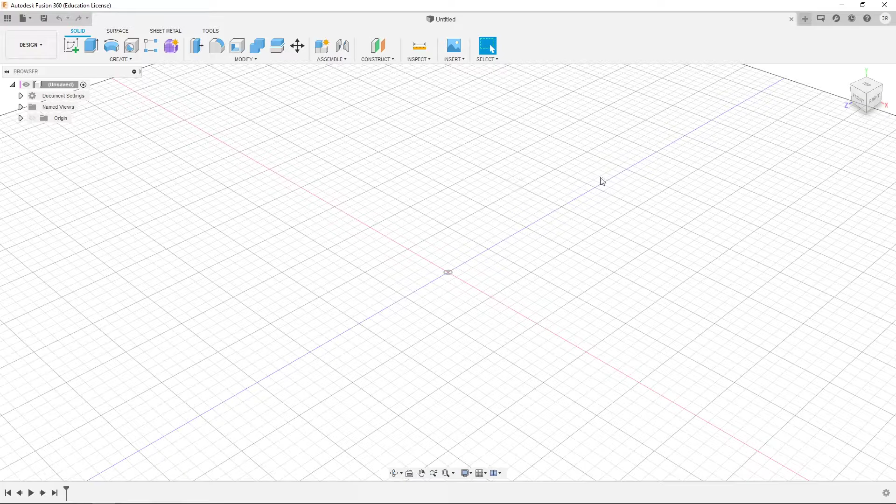I'm going to create a very simple sketch. I'm going to make a new sketch, pick the XZ plane just so it's top down. I'm just going to make a rectangle that's centered on the origin. And to save myself some work, instead of doing a 2-point rectangle, I'm going to choose a center point rectangle, so that way I can coincident with the origin. So I have my center point rectangle. I'm going to click the origin.

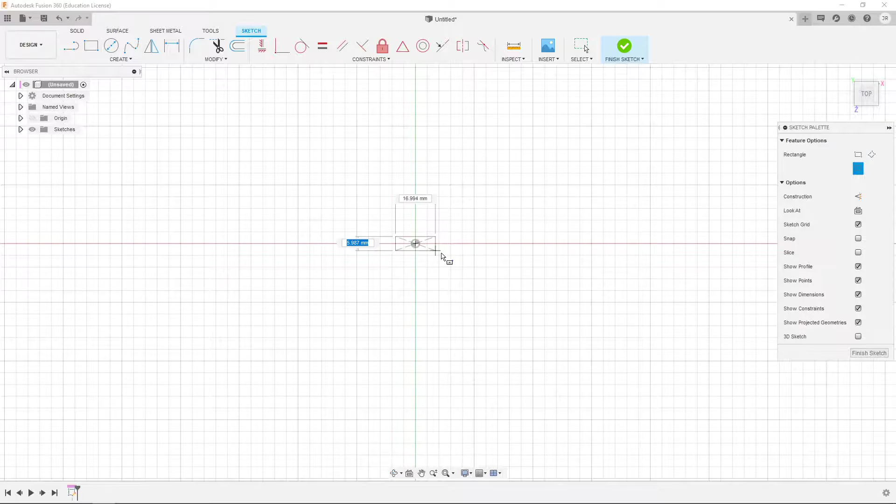And notice how it kind of makes this by default, and I'm going to choose 60 by 60, so it's a square. And there it is. And notice that it automatically made some construction lines for us, which is very convenient. I'm going to go ahead and finish the sketch. I'm going to extrude this out upward to 60 millimeters. So it's a perfect cube that is 60 by 60 by 60.

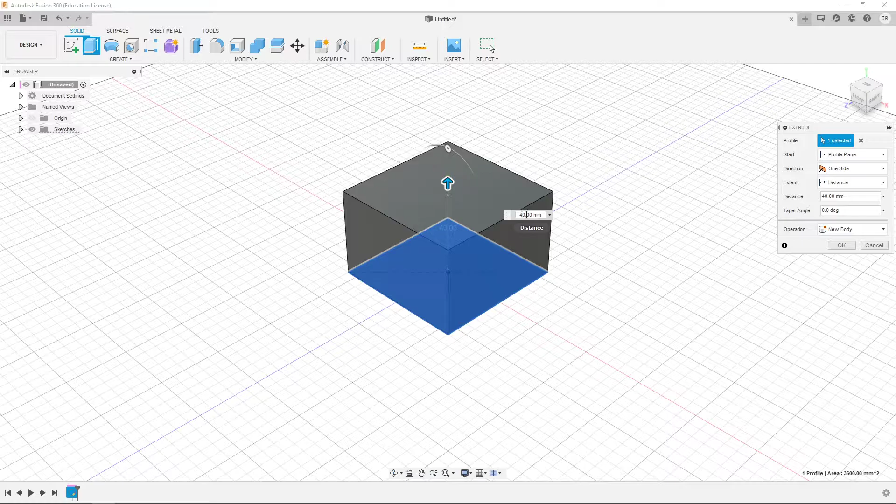And now I want to fillet the edges. So I'm going to pick one edge so we can see what a fillet is. A fillet is a manipulation of the 3D object, an edge, which is a line that connects or is one part of a face. In the Modify menu near the top here, we have the list of many different things that we can do on 3D objects. The first one, which has its own shortcut, F, is the fillet tool. And the description says it adds fillets or rounds one or more edges.

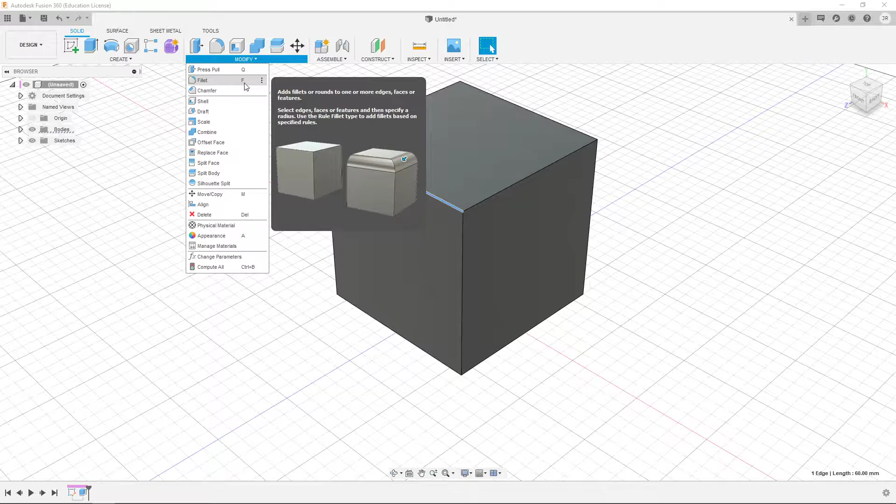So we can actually select multiple edges. I'm going to choose one first and try it, see what it looks like, and then we can maybe add more. So I'm going to click it. I had the edge already selected, so it's already there, but I can always click another one and I can unclick them as I see fit. And as I click edges, notice they show up on the right side, and then it asks how much do you want to fillet this edge?

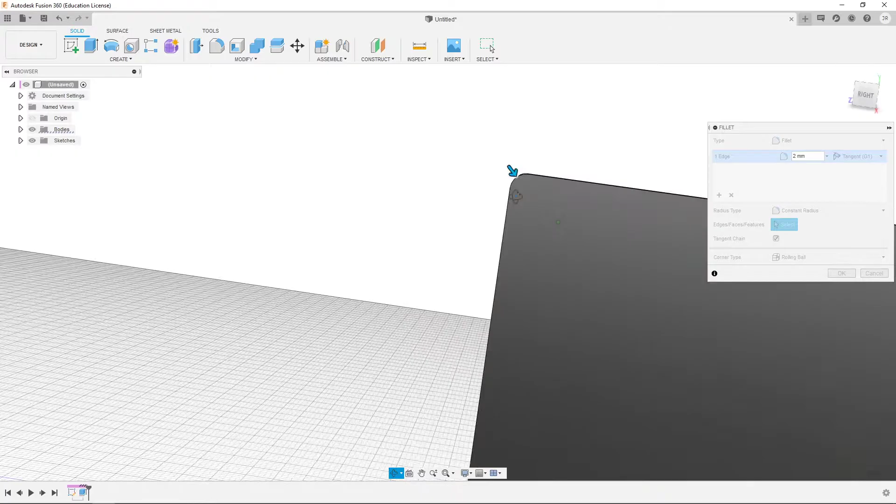So let's go ahead and type in a number. Let's put 2 millimeters. And you can see immediately it gives us visual feedback that it is rounded. It took a sharp edge and made it round. Now notice the other edges are flat, and so we have to ask ourselves, what's going to happen if we fillet two edges? How do they connect with each other, and what happens to that corner? So let's go ahead and cancel and try it one more time.

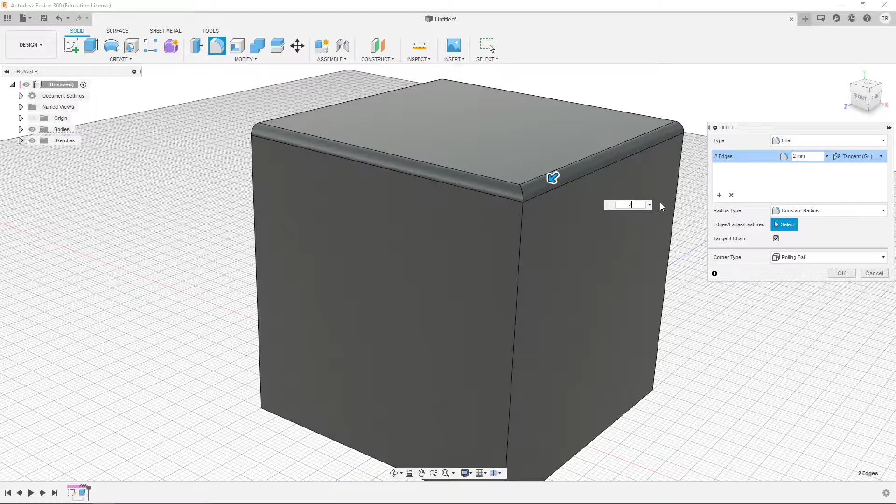I'm going to do Modify, Fillet, but this time I'm going to select two edges at the same time, and put it at 2 millimeters. Now you can see that it rounded both sides, but down the middle, it's a sharp edge, but it is a rounded sharp edge. You can see that kind of hook there as we look at it. So that's what it looks like when only two edges are selected.

And we can play with this as much as we want. We can always add fillets to more. Right now, this is a 2 millimeter fillet. The corner type is what changes, so rolling ball applies when all three edges that point to a corner are selected. Right now, there's only two. So let's try doing this and see what it looks like.

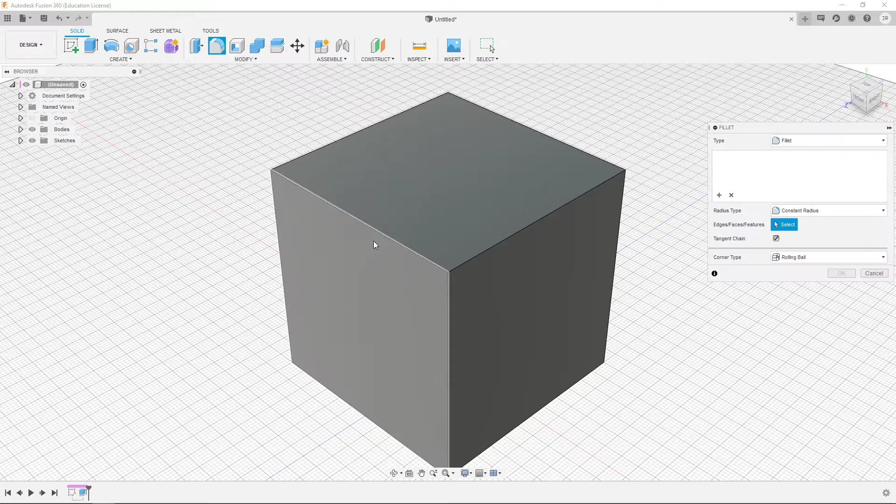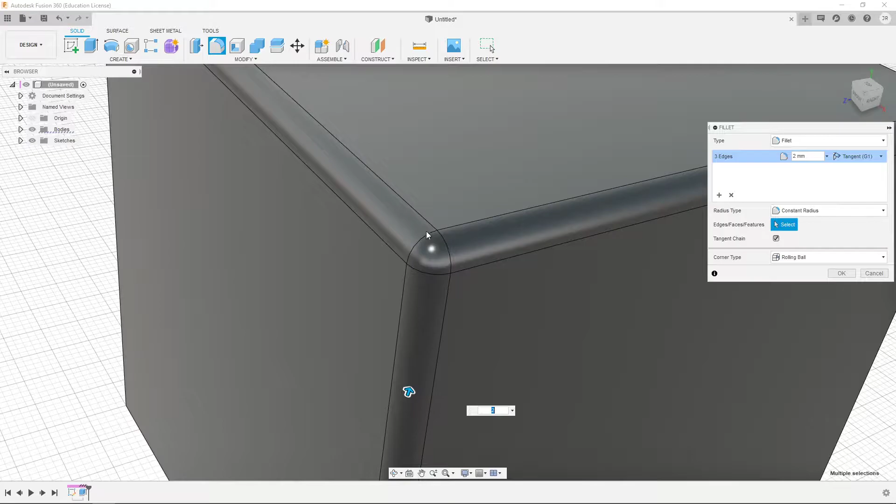So Modify, Fillet, and I'll just pick 1, 2, 3. Because all three of these lines are connected, this corner is going to have a particular behavior. Right now, the default is rolling ball. I'm going to put 2 millimeters, and you can see that that corner is a nice round corner. The result is kind of like a curved triangle, and that's our corner.

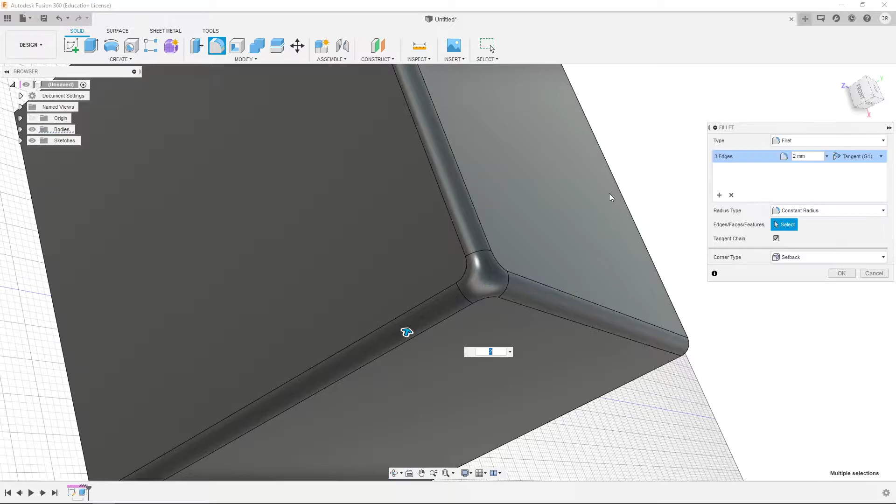Now, if we switch it to a setback corner type, it's similar, still round. In fact, it looks a little bit more rounded, but the edges have a flat cutoff point, and then the corner is its own feature with kind of a Y shape to it. So if that's what we want, we can have that, but we have to recognize there's different styles, and it's really a matter of what you prefer. There's no right way. It's whatever you think looks best.

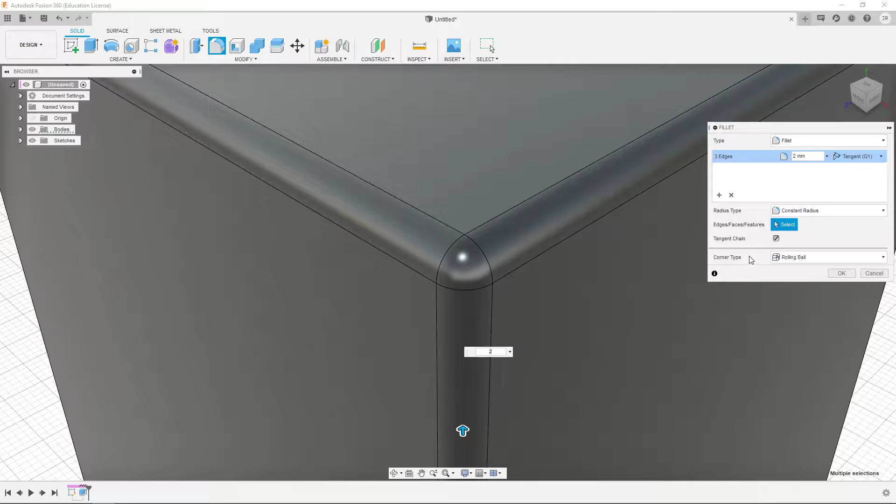So rolling ball is the typical one. You have more of the original edge available, so the feature in the middle is a much smaller and simpler feature. That's the only real difference that we want to play with. So I'm going to cancel.

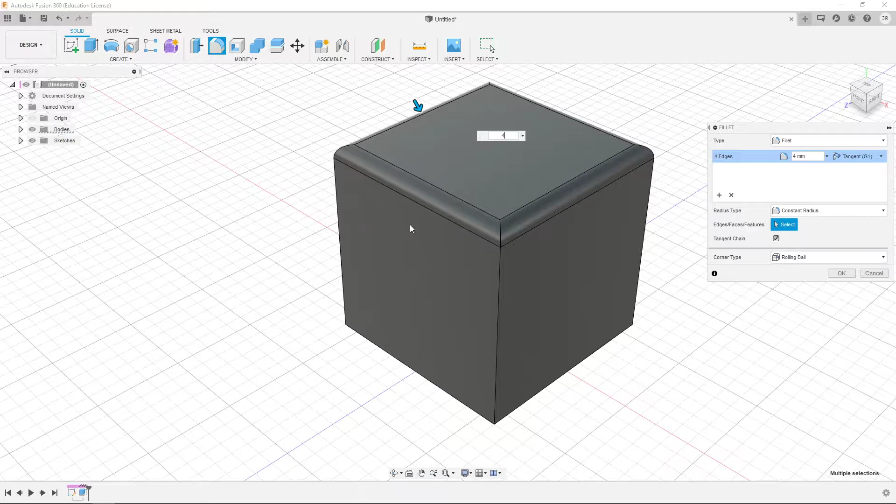I'm going to do one last thing and fillet just the top 4 lines. So Modify, Fillet, 1, 2, 3, 4. So 4 edges selected, and let's put them at 4 millimeters apiece. So they're pretty round. And again, since these side edges were not filleted, they all have a sharp round edge, and I'm okay with that, so I'm going to click OK. And so that's a fillet. A fillet is very simple. It's just a nice, easy way to do this.

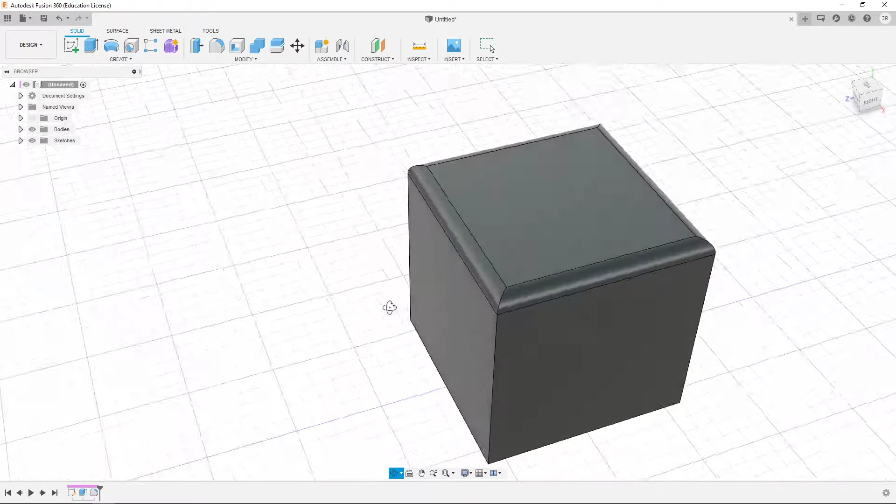Because these are outward-facing edges, the curve goes around it. If we had a divot, we could also make it look inward. It's the same idea—we can play with this in a lot of ways and make things look nice.

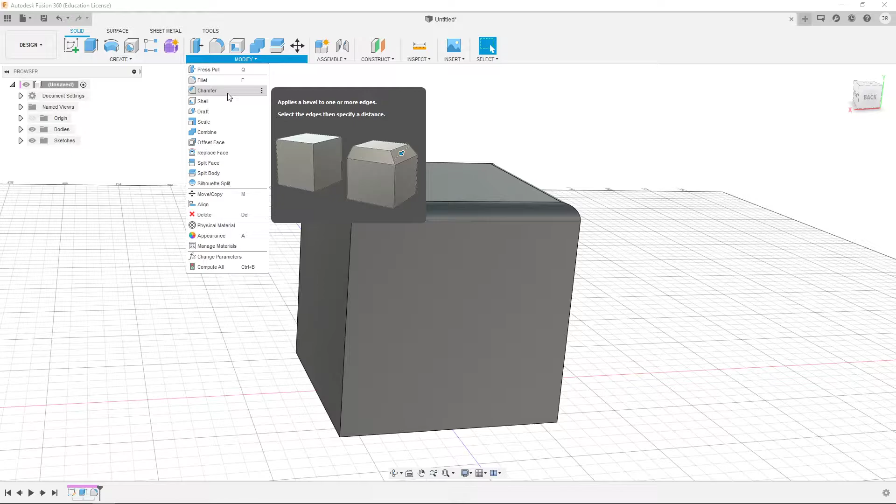So on the bottom of our cube, let's do a chamfer and see what the difference is visually. Chamfer is just like fillet, but it doesn't have its own keyboard shortcut. Basically, it bevels an edge, making it flat—so a sharp edge becomes another surface. The angle is based on how many millimeters we choose for our chamfer.

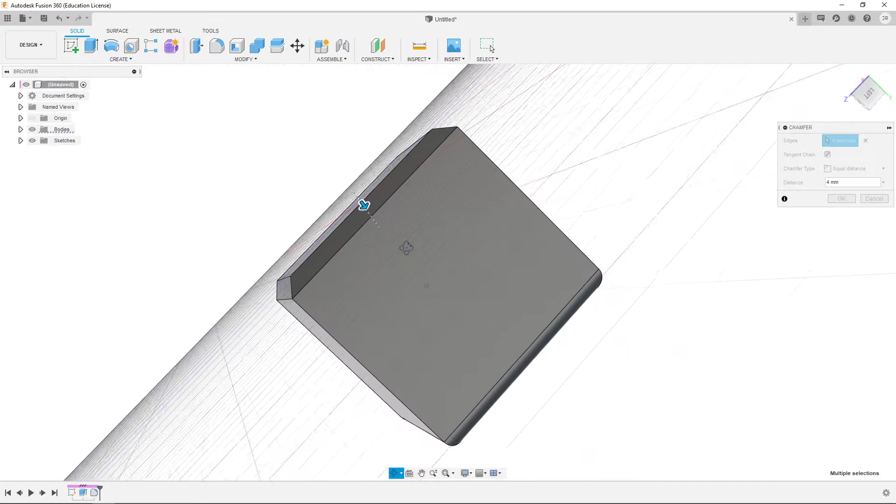I'm going to select chamfer, and choose the bottom 4 edges—1, 2, 3, 4. Now those bottom 4 are selected, and let's put 4 millimeters. You can see, there it is. The only difference is if you look at the actual edge, it's a straight line as opposed to an arc—that's the primary difference. This gives us a nice sharp beveled edge, so if you want that, it's a good choice. Chamfers are also really useful for things like that. So we'll click OK, and there it is.

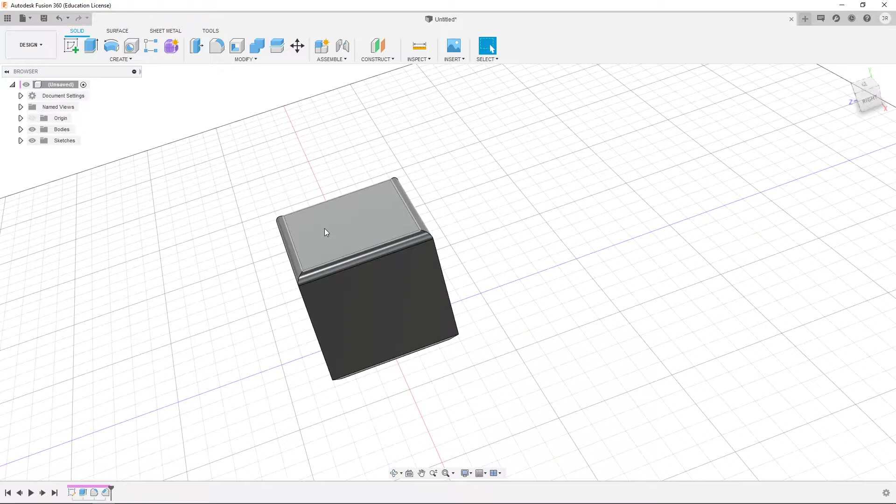Now I want to cut a hole in the middle of this cube so we can see what the fillet and chamfer look like on a circular opening. Right now these are straight edges, but how about on circular edges like a hole?

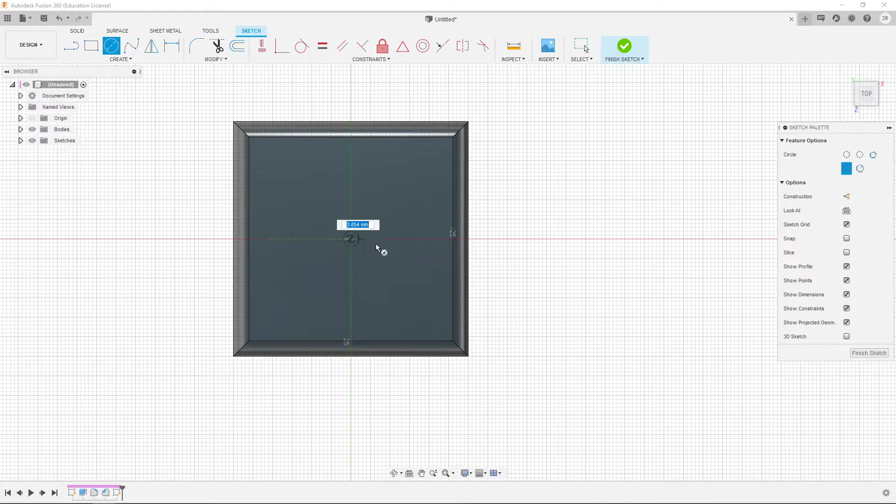Let's put myself in the home view and make a new sketch on this top face. I'll select it, it turns blue, and create a new sketch. I'll use the circle tool and put it right in the center, then set it at 20 millimeters—so I'll dimension it as a 20 millimeter diameter. There it is, fully constrained. I'll click Finish Sketch.

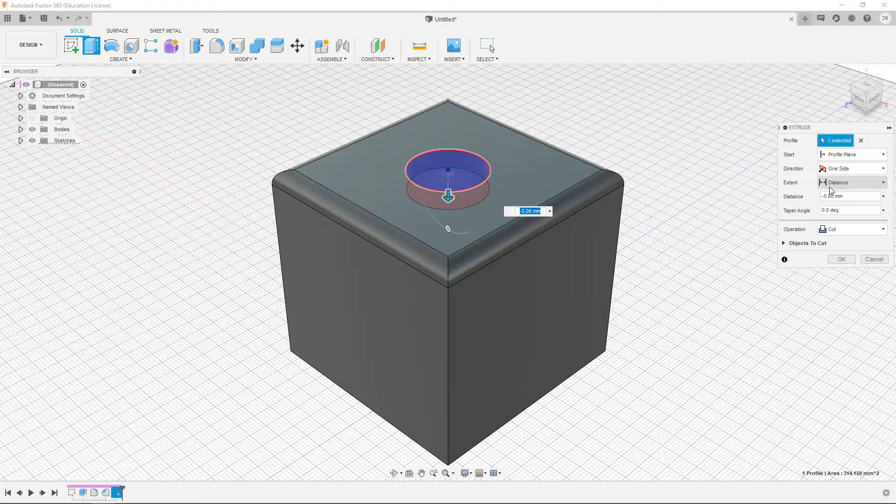Now I'm going to extrude and cut this hole out. I'll click this feature, bring it down just a little, then change extent from distance to all, and it'll cut all the way down through. Now we can see this hole goes all the way through.

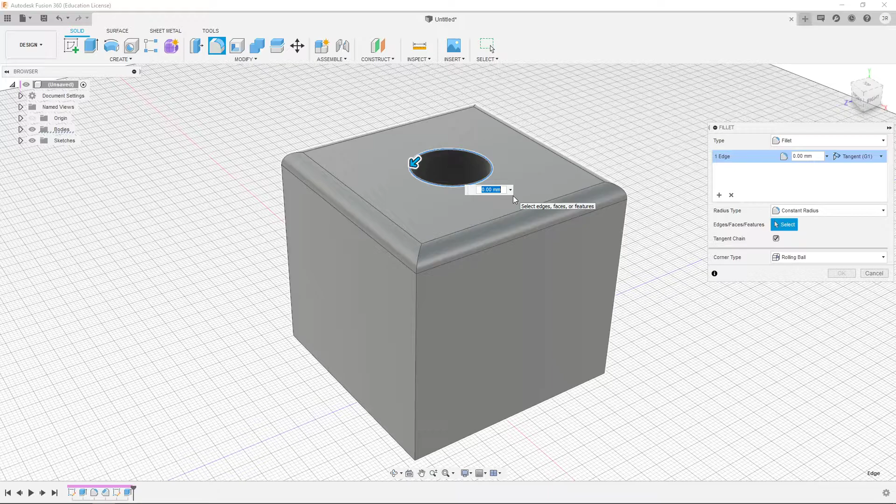Let's choose this top edge, so I have that top ring selected. Let's choose fillet—fillet also has a button at the top, and chamfer also has a button at the top. We can click any of those or hit F on the keyboard. Let's put it at 3 millimeters and click OK. Notice we have a nice round internal edge—the opening is smooth.

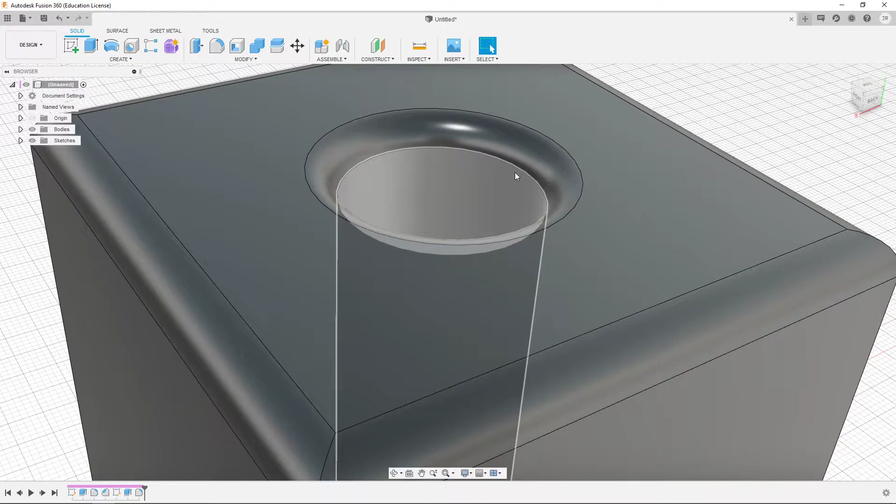This is very useful if you think about how things are inserted—for example, a rod might have to slide into this hole to connect two items. If there were flat, sharp edges, and you didn't have it perfectly aligned, it might be too snug. With this round edge, it allows for human error—you can push it against the rounded part and slide it in more easily. Fillets and chamfers are helpful for that friendly use by a person, since we can't always align things perfectly. If sharp edges got caught on each other, it might be hard to insert something—so a fillet makes that easy.

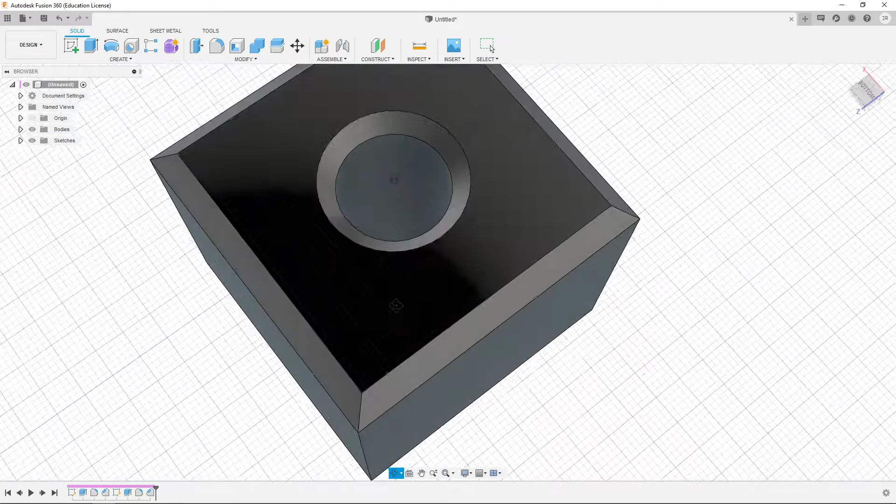Let's look at the bottom side and do the same thing. I'll choose this bottom edge, but instead of a fillet, I'll use a chamfer—modify, chamfer, 3 millimeters. It's the same idea, but this one is a sharp divot, like a nice opening—it's steeper, but it makes it easier to insert and grab something into the hole. The result is the top has nice rounded edges, the bottom has nice sharp chamfer edges, and whatever we prefer, we can use this on any edge.

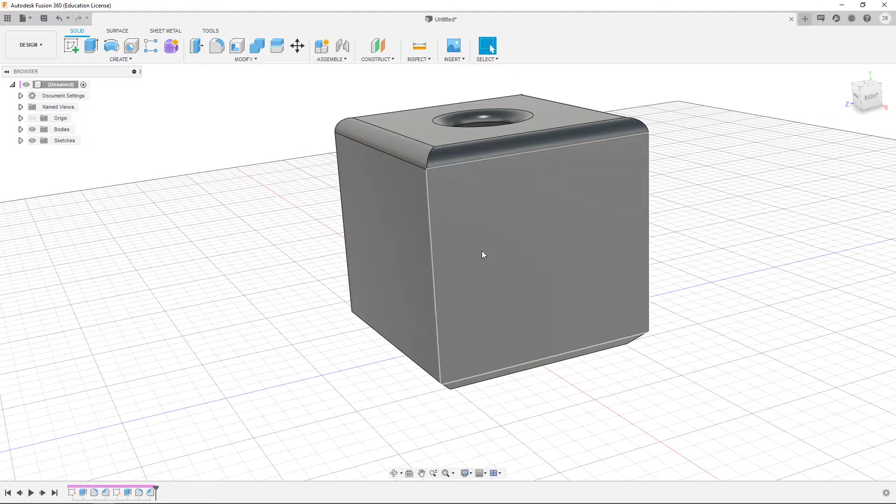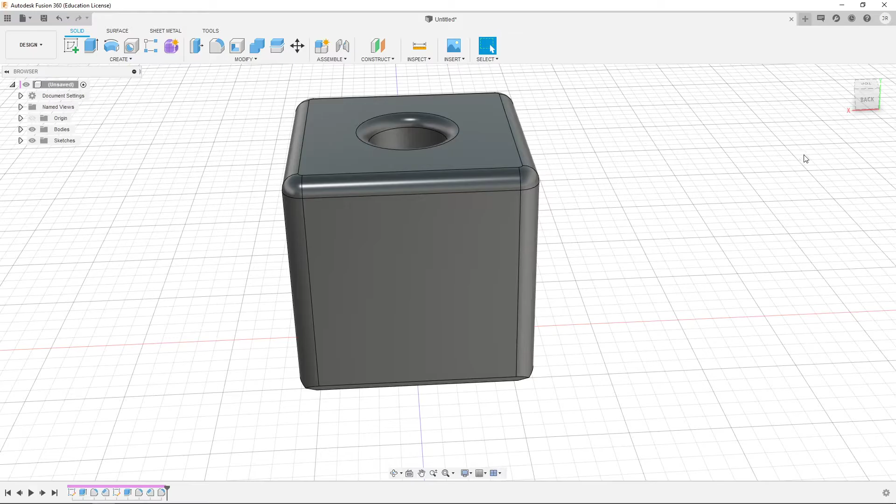So we could, for example, choose all 4 of these corners. I'll hold Shift as I select them, so there should be 4 selected lines—1, 2, 3, 4 blue lines. Now if I do fillet, I can round those too, let's say at 5 millimeters. The result is the tops are nice and round.

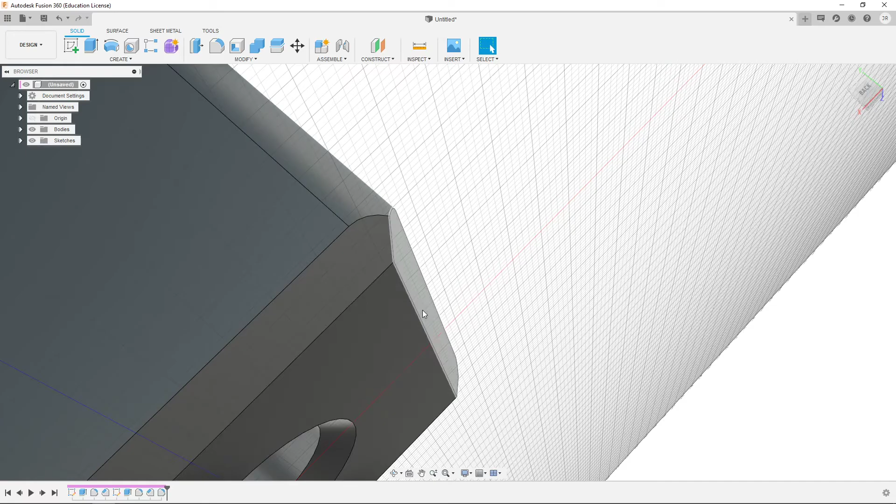You can see the feature of the corners because there's a third one that's round. On the bottom, it's a bit more interesting because this corner is a blend of chamfers and fillets, and it's not beautiful—it tried to make it round but also wanted to keep the sharp, flat chamfer edges, resulting in a weird curve on the ends. It's not terrible, just another approach—you can decide if that looks good to you.

So those are pretty simple tools. In our next video, we'll talk about some of the other modify tools.